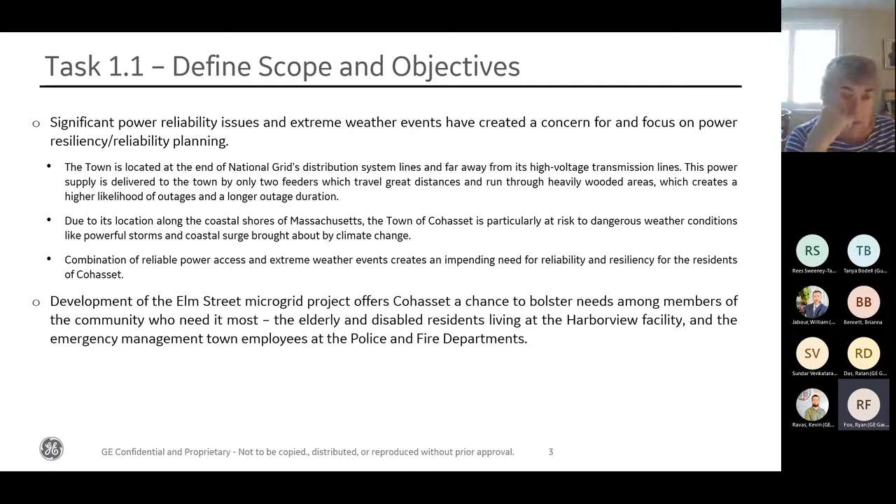So, first part of task 1.2 of characterizing the site is data collection, of course. So 3 different areas that we found data. Obviously, the town, through the materials that they had put together for the application process for the CLEAR project. We developed a questionnaire and submitted it to the various stakeholders around town. We obtained energy consumption and peak load at the 2 different buildings, and we obtained a proposal from Cohasset for the police department and fire department lighting improvement project.

National Grid, we also worked pretty closely alongside through a myriad of different calls. They provided us GIS drawings. They validated our 1-line representation of the feeders, provided outage logs, provided a whole slew of information that was very helpful for us, gave us average load shapes for buildings where we weren't able to get hourly load shapes. I will get into that in a bit, but very helpful there.

And then we performed a site visit where we did a detailed survey of the electric loads at the police department and fire department and Harborview. Obtained pictures, obtained drawings, etc., of the site layout, which really helped in the technical portion of the design.

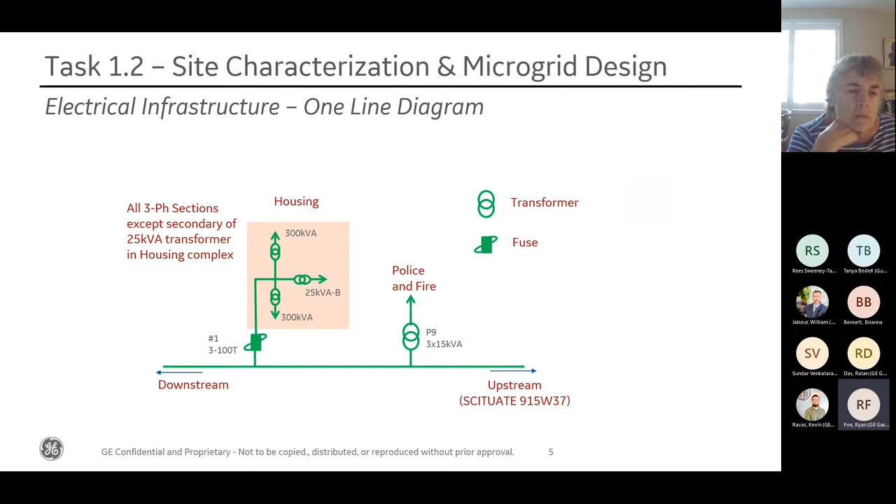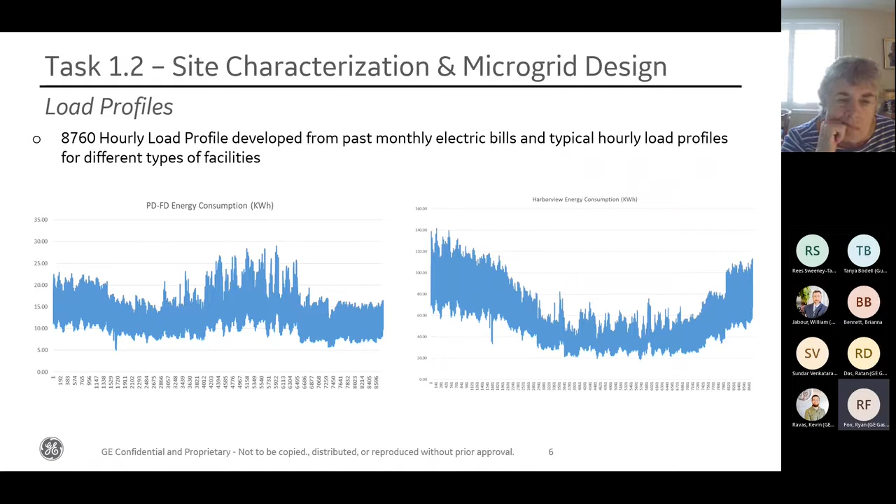All right, load shapes. So like I said, we did collect monthly data for both Harborview and the police department, fire department. And we were also able to collect the kind of class shapes from National Grid. The combination of those allowed us to derive an 8760 hourly load profile, which is effectively a 1 year profile at an hourly level of the power consumption at each building. That's what's represented here. It kind of looks a little crazy, but there's method to the madness. And effectively this data feeds into the next step of task 1.2, which is our Homer modeling.

So Homer Pro is the microgrid modeling software that we used to do the optimization for the site. Homer Pro is a piece of software that basically takes a bunch of input data like load shapes, existing generation specifications at the site, outage data, a variety of other things, financial data if you have it, power prices, things of that nature, and you basically cram it all into a magic box, and it runs a bunch of simulations and comes out with a variety of different designs, basically incorporating new renewable generation, new backup gas power generation, all in an effort to both mitigate reliability issues, meaning if there's an outage period, being able to cover load during the outage, but also providing a least cost solution to the end user.

So for this, the generation that we included, obviously the 45 kilowatt natural gas backup generator that's already located at site. We had obtained a study from the town that said that there was about 120 kilowatts of potential solar capacity on the rooftops between the two buildings.

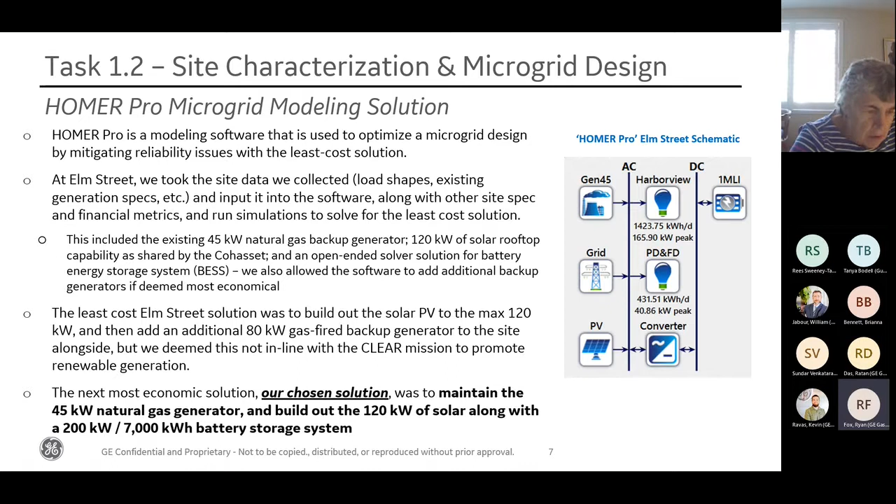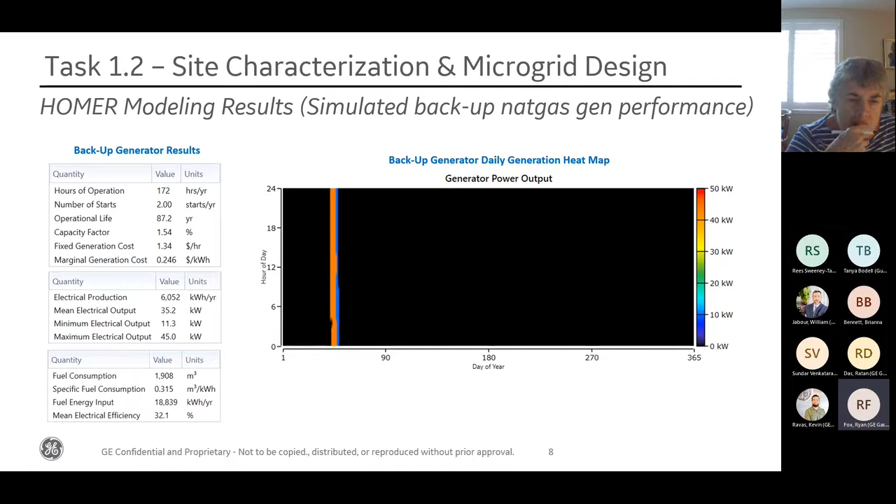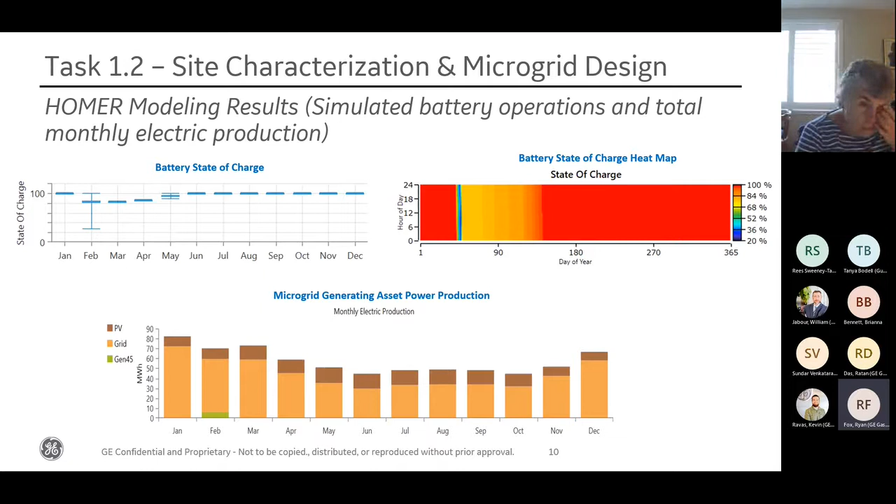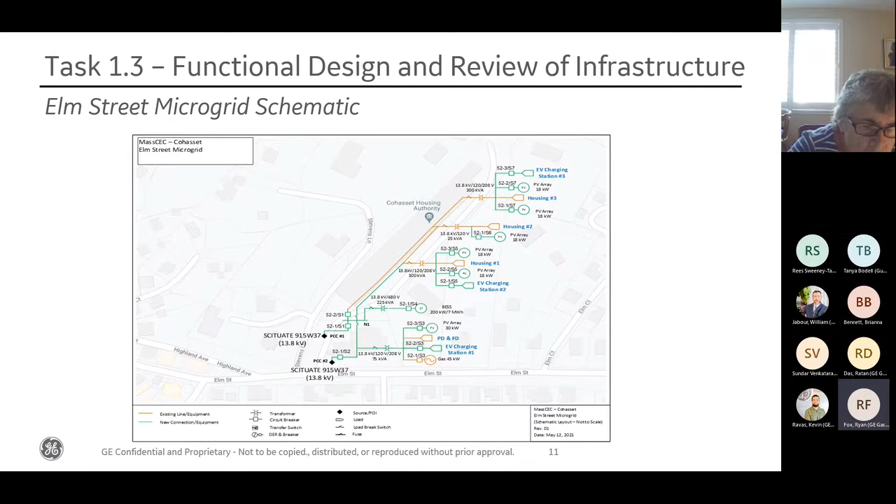And then you can see there's an additional PCC I think that we added, and then the battery is linked in, and you can see the battery up above the PV array, 30 kilowatt above the PD and FD building, and then some PV arrays scattered along the Harborview buildings. Okay.

One more bit on the functional design. So, the microgrid control strategy: in a normal state, the intent is that the microgrid will operate as usual, except there's an additional connection at the police and fire department to the main grid.

The additional generation that we've installed, that we modeled and discussed previously, will continue to operate during normal conditions. The backup generator, the 45 kilowatt natural gas generator, will be offline in a normal state. So obviously that means the battery storage system will operate in its state of charge, whether it's involved in a demand response program or bidding into an aggregator into the power market. It needs to be determined for the town how to handle that, but that'll be online, and obviously the solar PV will continue to generate electricity for the town when the sun is shining.

Emergency state: the microgrid controller that will be installed to oversee the operations of the microgrid will continuously monitor the points of common coupling, the PCCs. There are 2 of those that were highlighted on the previous page. When there's a grid outage detected by the controller, all of the facilities in the microgrid are then isolated from the main grid, and effectively what happens is they open the breaker there.

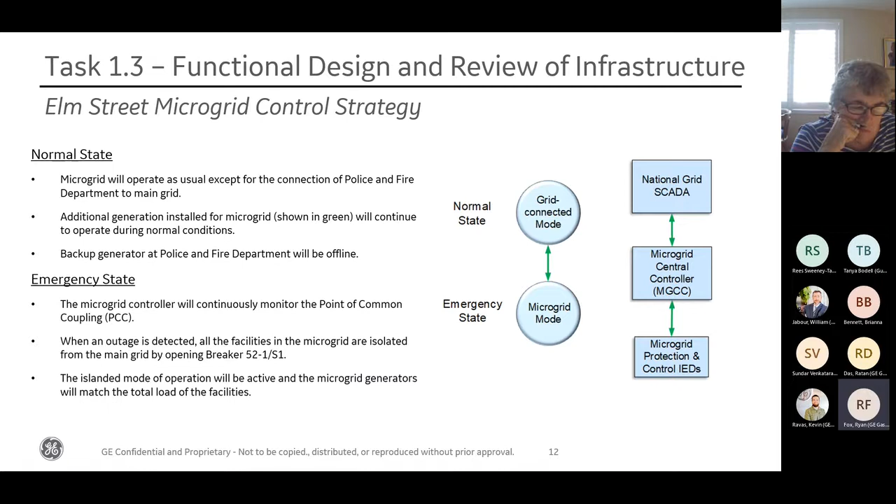Another issue with the 100% ownership option is that it could be subject to objections through National Grid. They don't have very well developed tariffs around how microgrids are owned or operated within their footprint. And so that is still kind of taking form. Assuming everything gets cleared appropriately and there's no objection through National Grid, this is the option that the project team believes is the ideal option.

And it's only because the overall cost seems to be within an acceptable range, and it seems like the most critical element of this project is to maintain reliability and resiliency, and to do that, it's critical that the town has absolute autonomy over the assets and how they're used. And so that was kind of the rationale there.

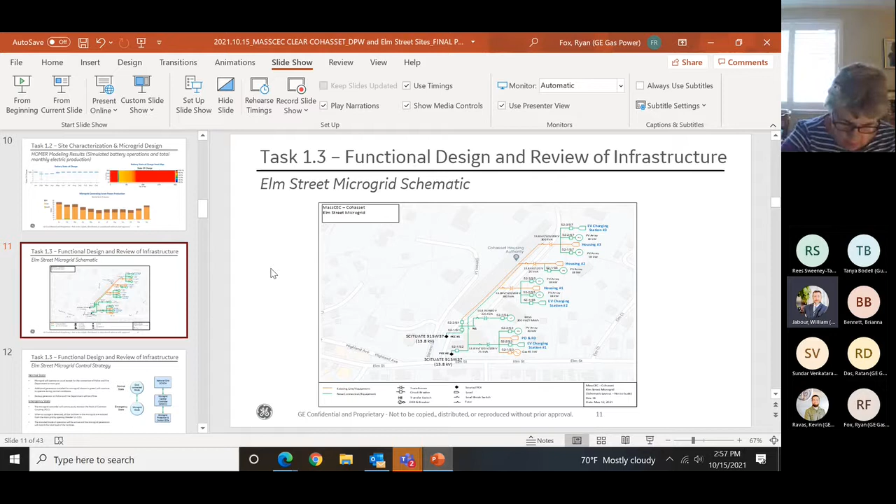Thanks, Ryan. And then Brianna had a question. She's asking if you can dive a little bit deeper into the annual $50,000 maintenance cost, and what the cost was accounting for specifically?

I don't know how much detail you want there, but a fixed O&M is like a salary, or it could be a contract that you solicit through a third-party contractor who provides services and maintenance, things of that nature. Variable O&M tends to be more based on fuel costs, things of that nature. So I don't know if that helps discern between the two levels of costs. Yes, it does. Thanks.

Sorry, may I add a sentence or two? Yeah, please, Sundar. Okay, so I think a lot of those fixed costs were towards maintaining the battery capacity, if I recall correctly. Yep. Yeah, I think a lot of the fixed O&M expense would be required to maintain the battery, right? Yeah, particularly the capacity degrades over time, so you may have to add new modules, and I believe those were some of the major cost components of the fixed O&M.

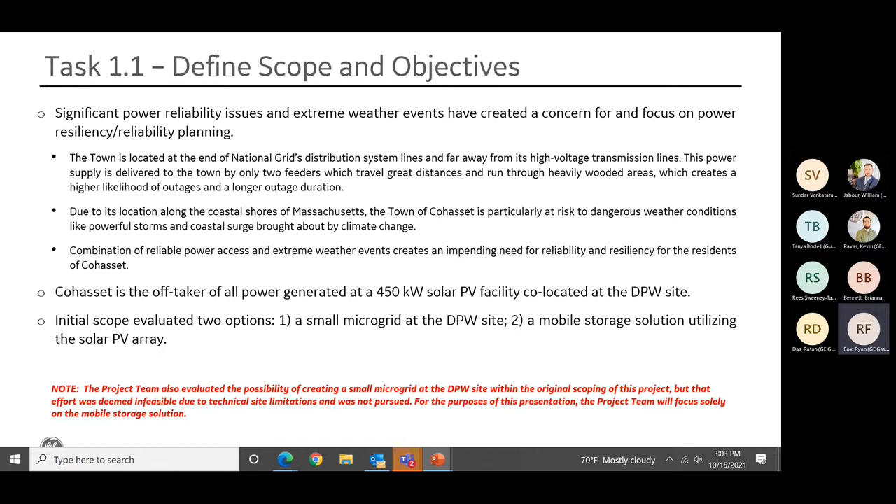That said, not going to spend a lot of time here because we covered this in the previous presentation, but we obtained a bunch of information from Cohasset through different resources. With this one, the only additional resources we had were the solar PV 15-minute production data, some of the invoices from CoSolar LLC, which is the partner company or the owner of the solar asset that Cohasset has the PPA with, and then some of the PV solar as-built drawings.

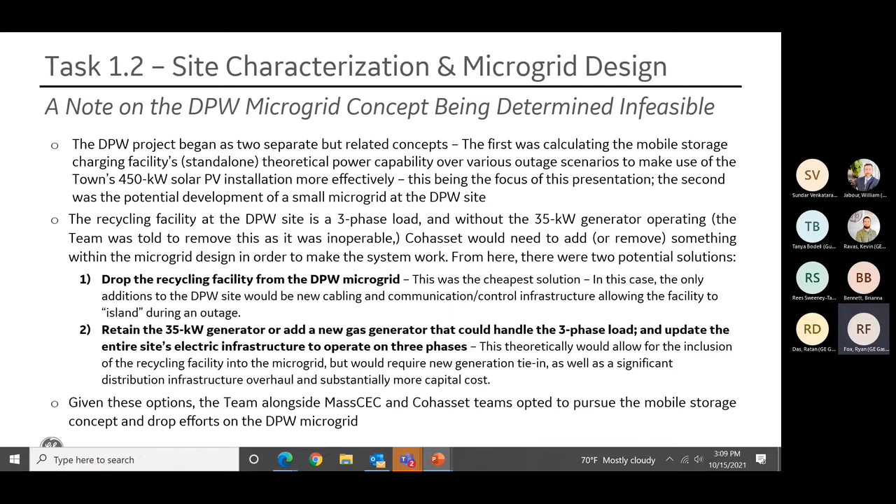Just wanted to give that feedback because we did our best to highlight this in the report and in this subsequent presentation, but it's a noticeable change in focus, so that's the high level explanation as to why. So that said, Sundar, I think I'll turn it over to you here for the mobile charging concept discussion, and then I can take it back when you're done walking through this.

Okay, sounds good. So the concept that we explored here was to have mobile storage units that could be used to meet the load, meet the demand, wherever that was needed within the town. So the concept that we came up with was basically there would be 2 mobile storage units, and later on Ryan's going to be talking about using electric school buses, but I think it's a lot easier to use the concept of 2 mobile storage units, and then from there we can easily understand how this concept could work using electric school buses.

But the idea is this: so there'll be 2 battery storage units parked at the DPW site, and they'll be charged using the energy from the solar arrays at that site. And whenever there's an outage, these 2 units would basically take turns in meeting the load.

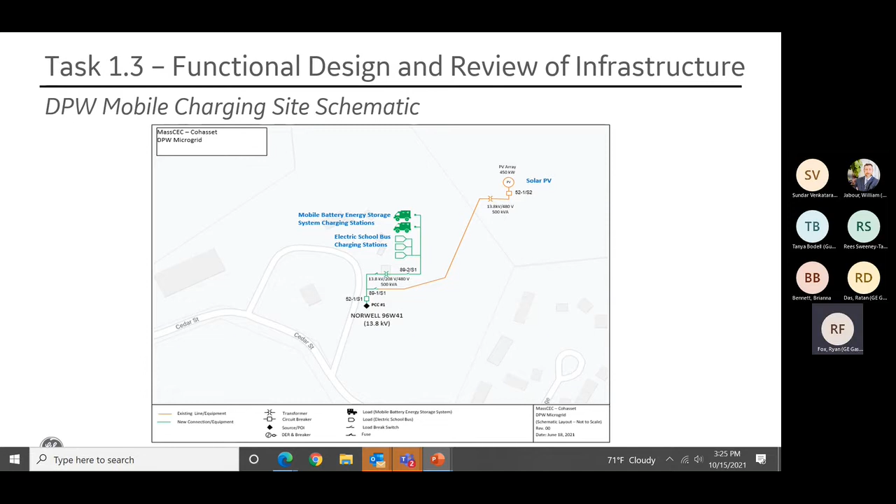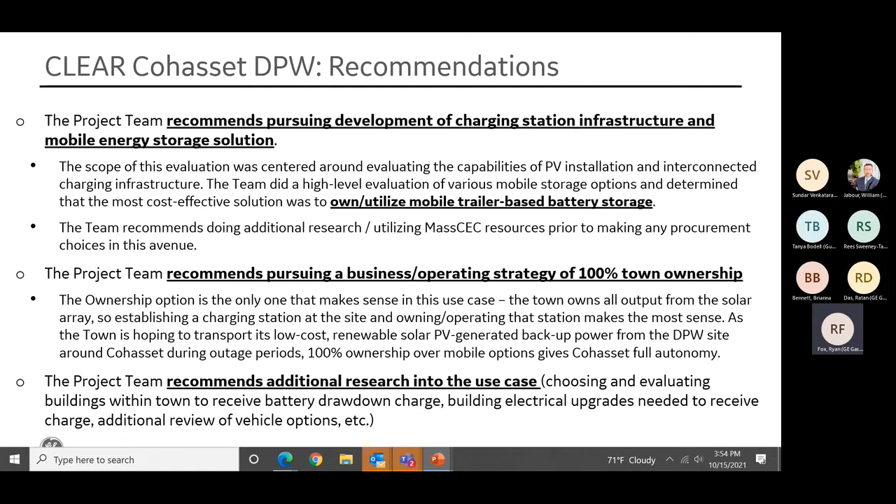So that's it for us on DPW. Thank you again for your time. We really appreciate it. This was a really cool project, I will say. It was challenging, of course, but it was really fun and really interesting to learn about the space and how it's developing. And we really hope that the work that we've done here feeds into a solution for the town to make use of the solar array and the really cool idea of sharing that around the town to buildings in need. So thank you very much, and happy to take questions and comments.

I just want to thank you for all of your time, and like you said, you did like a 90-degree turn on this one partway through. So I'm sure it was not what you expected, but I think the end result is very helpful. This is one of those reports that we could take to the bank, if you would, especially if we get a valid end use case that provides a lot of value and is feasible.

This sort of takes the electric buses to the next level, right? It's no longer V to G, vehicle to grid, it's vehicle to building for us, right? So it's snappy, it's fun, it's a case study, it's interesting, it provides one more value proposition. There's obviously cost that goes with it, but if we looked at different alternatives for that particular use case, I think we could get the economics down, and a 90%, 80% funding opportunity, if those are still available, would make this a total go.